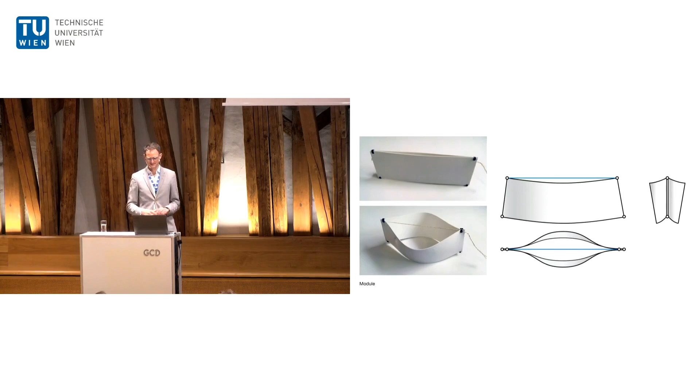So after I came back from London, I wanted to investigate with the students how to build complex grid shells or surface structures, but how to do that with very simple means, using always the same elements and the same parts. And I thought the good thing about this quest is if all the parts are the same, then they're really easy to produce. So I can just ask students to produce a part, right? They can make up any part they want, and then just start adding it together and see what happens. And so students did that, and then shape emerged from this, and I thought it was really interesting.

Another student, for example, decided a different thing. He wanted to use cubes to create a three-dimensional doubly curved surface like this. And I said, no, that's not what I wanted. I wanted you to design a complex object that then emerges into a 3D geometry. You can't just use cubes. Cubes want to be in a flat surface.

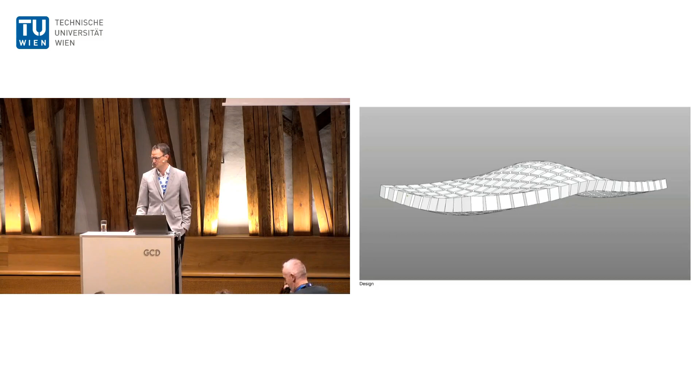He did it anyway, and then the rest of the semester we struggled with the idea of the gap, the void between these cubes, right? And first we thought, okay, we can just make single rings that are different in size, but we realized they're not only different in size, depending on the angle, they also start shifting, right?

Because they actually are not all in the same row. They have a curvature sideways, and there's also a twist that we have to accommodate for. It was getting really complicated. But again, we didn't know it, but we were learning all the time.

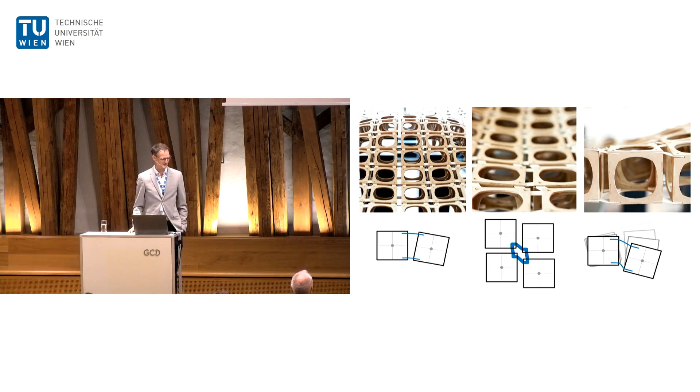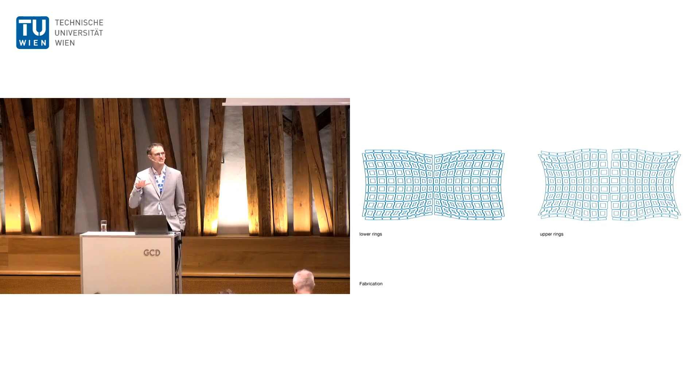And we also realized that this is a continuous law and relationship. So these are the rings on the top and the bottom, and they actually match up nicely into a continuous pattern, creating this beautiful sculpture.

One more example that I thought was always quite nice, we had students looking at folding and curved folding. It's really a hip project nowadays. So they were really doing this very fundamentally. What if I make a curved crease? I get a convex and a concave, and I can mix and match that, right? So I can create convex on the outside, concave on the inside, or vice versa.

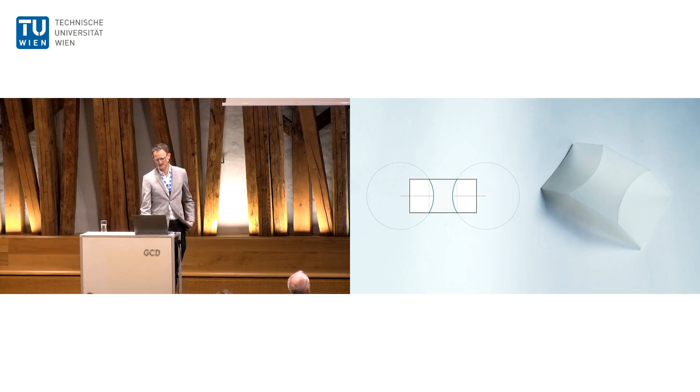And so doing this, I can also create modules where I can control the tangency on the outside of these modules. And they wanted to build a three-dimensional surface with this, and we tried not to use the computer. So we tried to do only repetitive parts. So we had this idea, why don't we just look back into the Schläfli diagrams of Platonic solids.

So if you look at the Platonic solids, you can describe the whole geometry just with two numbers. 4, 3, for example, is a cube. 4 means 4 edges to each side, and 3 means 3 faces are meeting at each node. Right? So these two numbers describe the whole geometry of a cube.

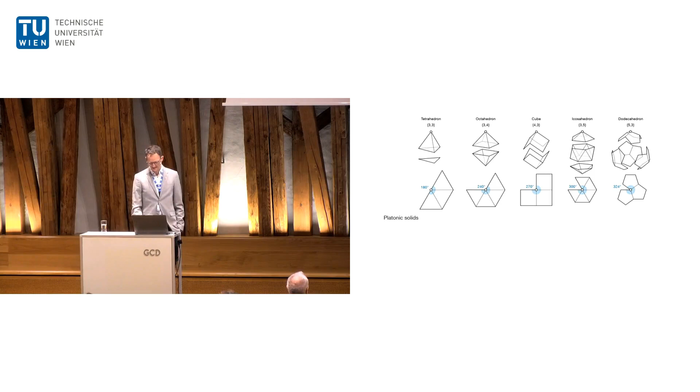So if you take those and you think about it long enough, and you want to create a curved crease model out of it, if you want to flatten that curved crease model flat on the ground, then the pattern has to look like this. If 3 things meet, it has to be 120 degrees that they meet at. And every side has to be 4 sides.

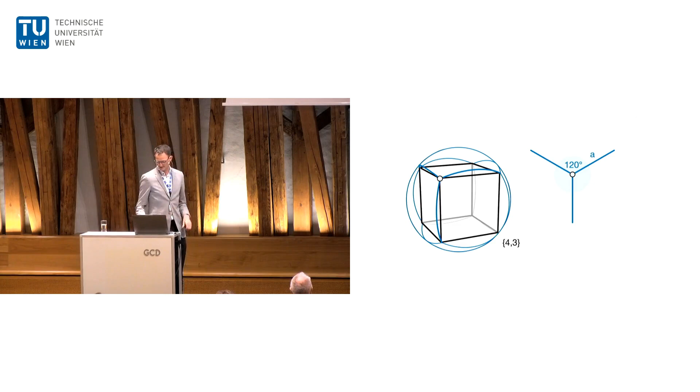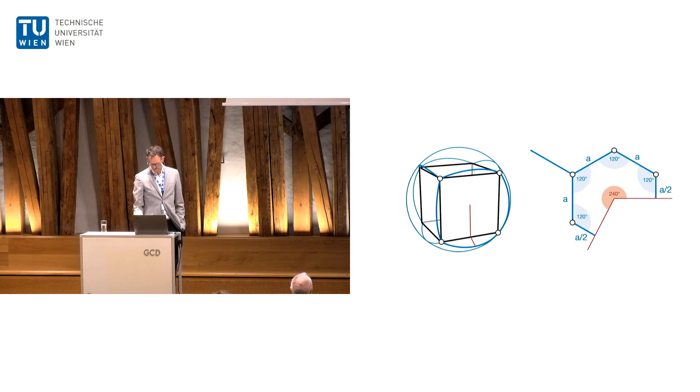So I can continue one of those elements and add 4 sides. So 1, 2, 3, and 2/2 is 4. So this must be the flattened version of my module, just based on the rule of a Schläfli diagram. So if I then put circles inside that and I fold it, voila, it actually works.

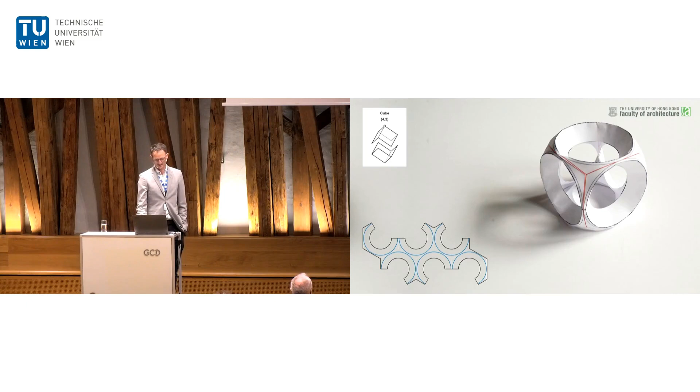We didn't believe it ourselves, but you can just do that with a crayon on an A4 sheet of paper, and you can create these beautiful curved crease Platonic solids as cube or tetrahedron or octahedron or dodecahedron or icosahedron. And so this is the one that the students decided in the end to build.

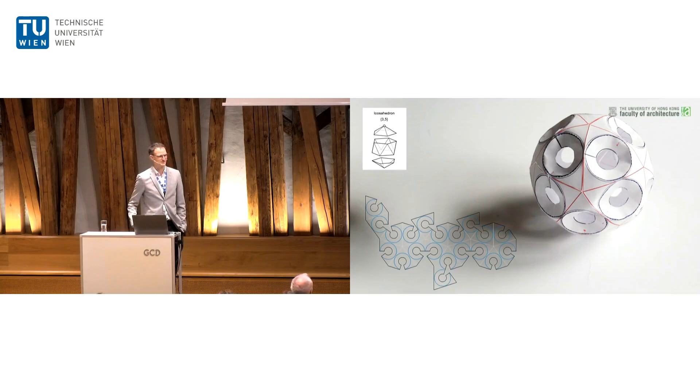And we learned a lot about geometry, about how these things go together, and how if you understand geometry and you understand the construction, or you want to simplify the construction, and you combine that even with structural knowledge, you can create very meaningful design of what I call repetitive structures, so structures that always use the same elements.

And this became my PhD, and at this point Herr Pottmann became my PhD advisor. And in this work I looked at a lot of structures that are built today out there, and I really tried to understand how can I capture this idea of repetition better. And in the end, I had to start learning more about geometry, and I realized that there's always joints, edges, and faces that need to be solved, right?

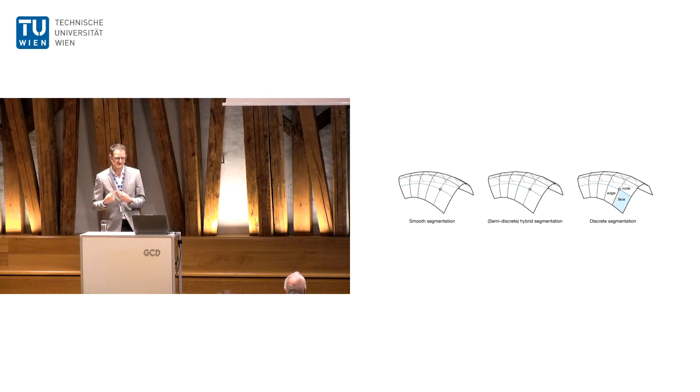So now let's go back. I tried to tackle these things in my PhD, and I realized that when we build something as an architect, we can either do it discretely, so using straight elements, but then we have all the complexity in the node, or we can do it smoothly, and then we have very simple joints, but then we have all the complexity in the edge, as we've just seen.

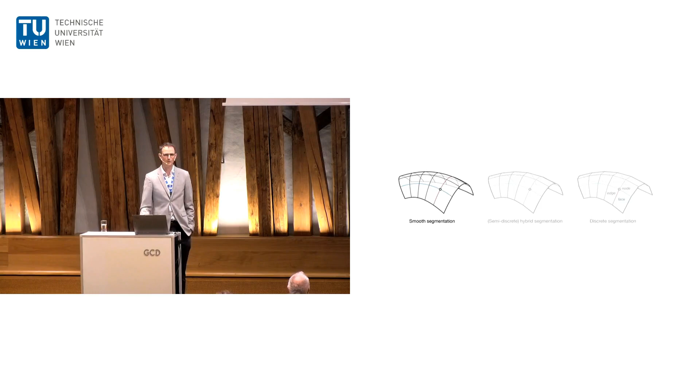And I was more interested in the smooth option, but in general, I just wanted to understand how we can control these parameters. And so I need to pick one specific thing out that really governs a lot of my research, since it's understanding the curvature at play here, right?

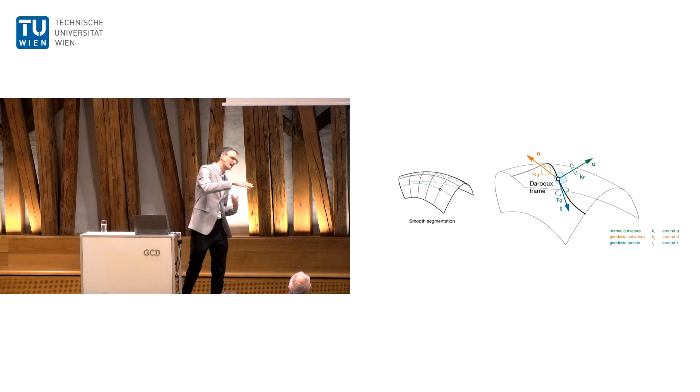So if you follow such a smooth line on a surface, it actually curves in 3 directions, right? It curves up and down, and that's the normal curvature, the normal thing we measure, but it also curves left and right, that's the geodesic curvature. And if you walk along that line, you might also tilt from one side to the other, and that's the geodesic torsion. For engineers, this is very easy to understand because those 3 local axes of a beam are the 3 bending axes, and in geometry, those are the curvature axes.

And so this is really, once you understand that, it's quite simple. And so I try to have a table of parameters that I need to control in any grid shell in order to create repetitive parts. And so I thought, if I just list all the parameters and they're all the same or constant throughout the structure, then the elements also have to be the same. That's an easy thing to do. So I started listing them.

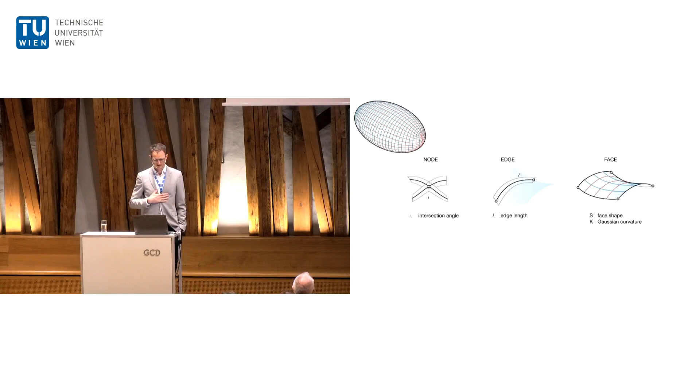There's the element length, and the intersection angle. And then for these smooth networks, there are these 3 curvatures. And you can actually just transpose that into the discrete case, and then instead of 3 curvatures, you get 3 node angles. These are interchangeable, actually. You can calculate from one to the other. And that gives you a total of 8 parameters. And there are, of course, more parameters describing the faces, but I won't talk too much about those today.

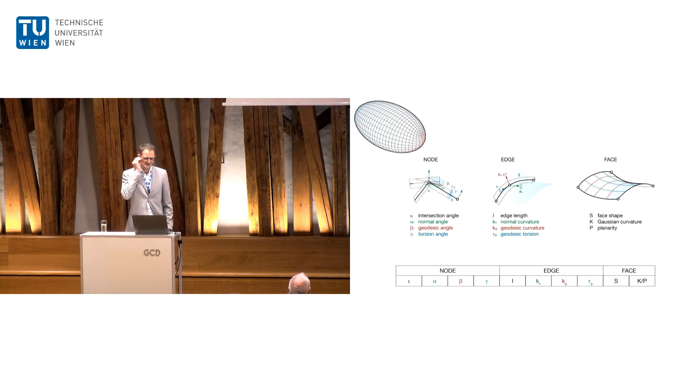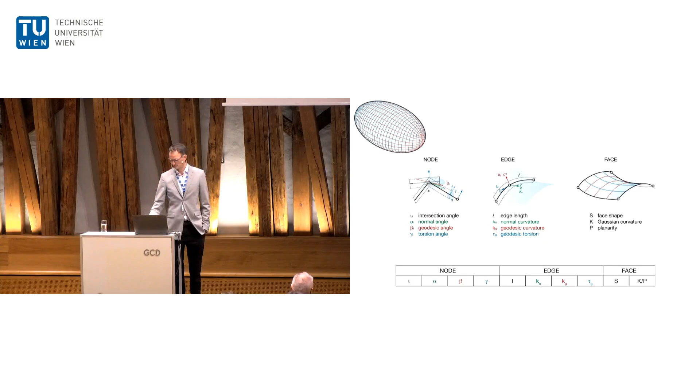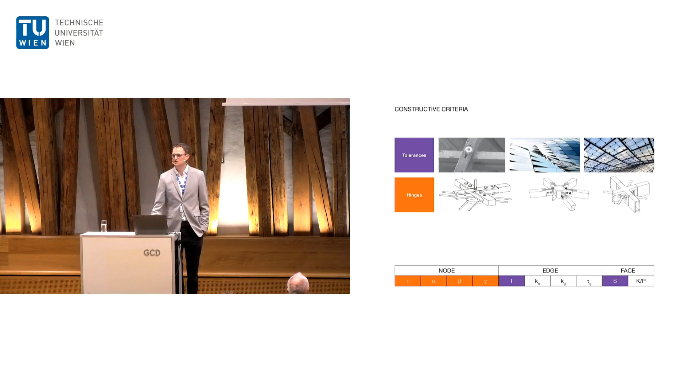So I thought, okay, that's it. But then I realized, as an architect, there's actually more, right? So you can actually build a structure from repetitive parts that's geometrically not repetitive. So there are some tricks we can use as architects and people who manufacture this building. And those tricks are the tolerance you use in buildings to account for changes in length, the hinges, joints we use to account for the change in angle, and deformation to account for the change in curvature.

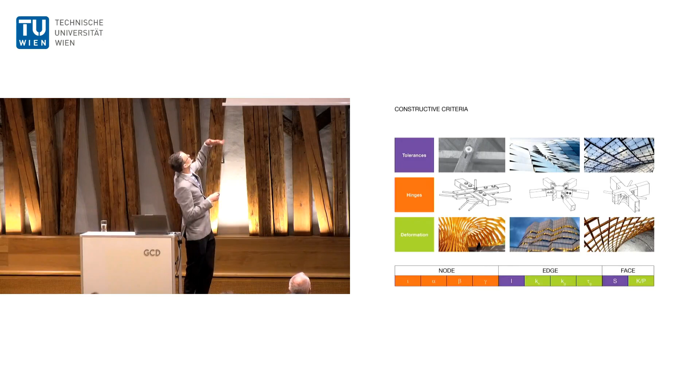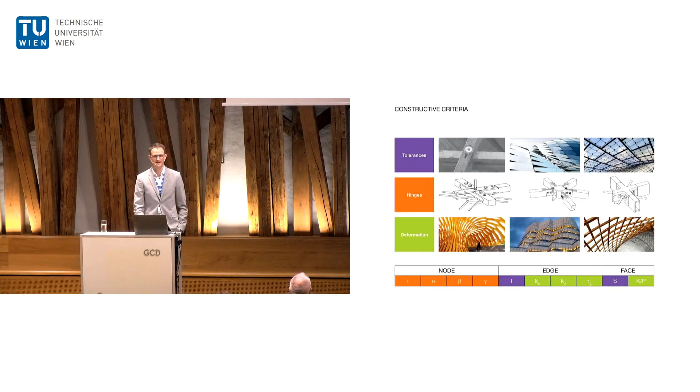And these 3 criteria nicely actually map with these different parameters, right? So curvature parameters, you can deal with elastic deformation, hinges, you can deal with the angles, and so on. So this was the very simple theoretical framework I started with, and then I started analyzing existing buildings to see how architects have solved this problem in the past. We've done a lot of work on this, and I don't have time to show a lot, but I always have to show this one example because it's one of the most important precedents to my research that came afterwards, the Multihalle in Mannheim.

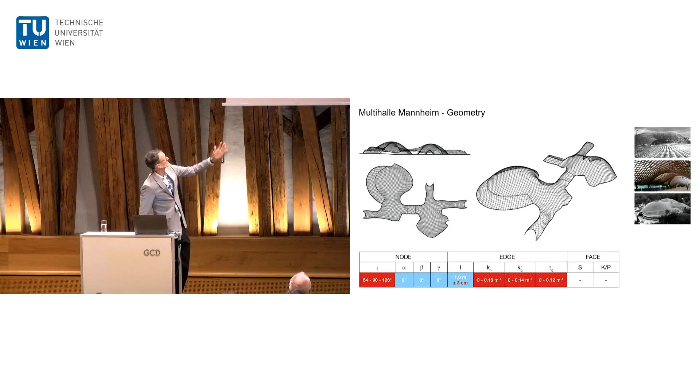So we all know how Frei Otto designed this grid shell by hanging a net and then creating this net by bending these wooden laths into the correct shape. And so we remodeled it, and we used these parameters to measure all the different parameters in this net, and here you go. There are no complex angles other than the intersection angle, and there's a lot of different curvature. And if you look at how it was built, you can see Frei Otto used a hinged joint to account for the different angles. He used a little tolerance in the length to account for that, and he of course bent all these lamellas. So that's quite simple.

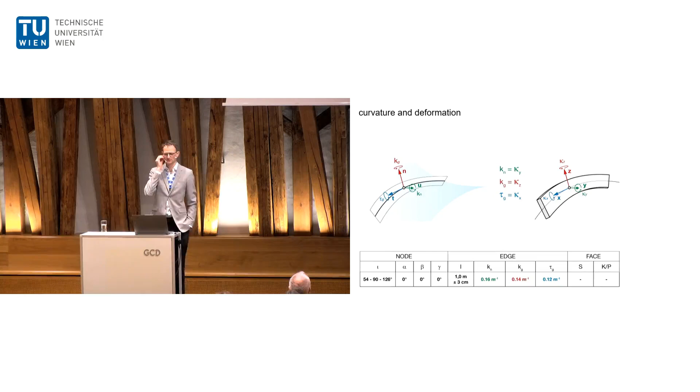But the good thing about this is now that we could really measure these parameters, and we could measure each axis, we can actually learn more about the structure and how it was built, because we can transpose the curvature into the actual bending stress that occurred during construction. So we can take these values and use the Euler-Bernoulli theory to calculate the bending, and we can use the Saint-Venant theory to calculate the shear stress for torsion. And actually for very high twisting, we need to also account for additional normal stresses due to this helix effect. So that's called the helix torsion theory. We can use that too to calculate all the stresses occurring through this geometry.

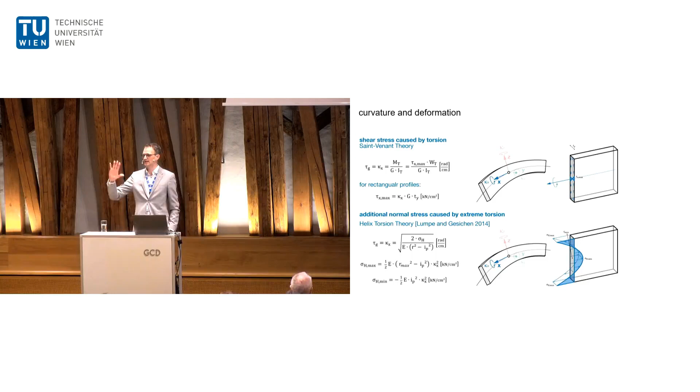So just by doing a simple geometric analysis of that final geometry, we can actually simulate what the stresses were when this Multihalle Mannheim was first built. And they did these tests too back then. I don't want to say this is brand new, but back then they only tested for the spatial curvature. And so this is now dissecting all the 3 axes of the profile and also seeing the twist that happened.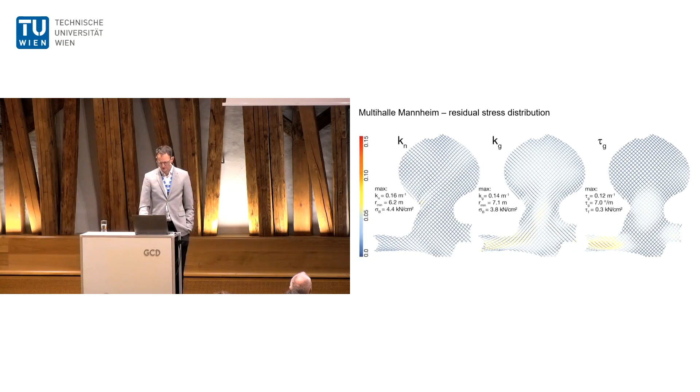As I said, we're using this a lot to analyze buildings, and I just want to highlight one more publication we did, which I actually never presented. We looked at Vladimir Shukhov, early pioneer of steel structures from Russia at the turn of the 19th century. He really revolutionized the way of how to build with steel, and the mindset was very similar. How can you take the simplest elements, always the same elements, combine them and twist them a little bit elastically or maybe even plastically? I think Shukhov didn't care, but how can you just tweak the rest on the construction site to create great doubly curved structures from very simple elements?

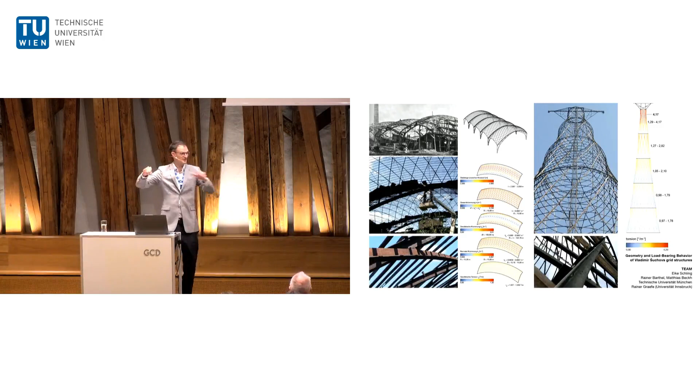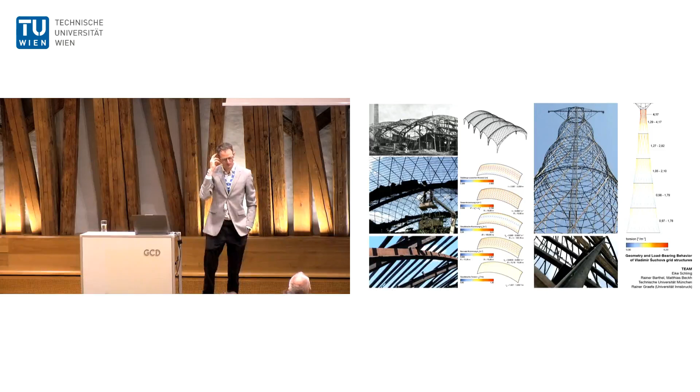And we could actually remodel those and find out, for example, that the non-constant torsion is actually highest in the top element of this tower and must have caused a lot of pain to the workers, because we knew the L profiles they used, and we could realize that it was almost 40 kilo over a meter lever that they had to pull to twist this into the right shape. And we could also model some of the other grid shells and actually learn about the construction process and also about the geometry that Shukhov must have used.

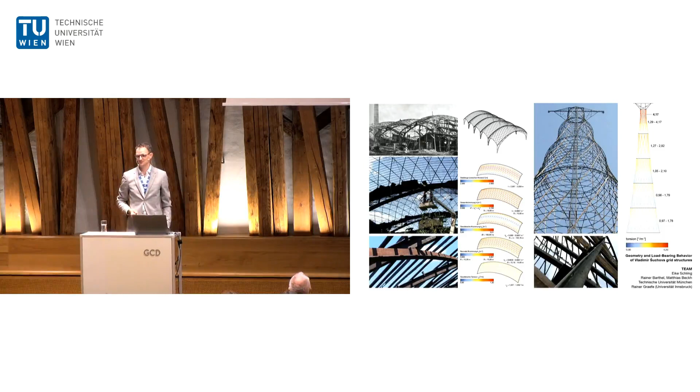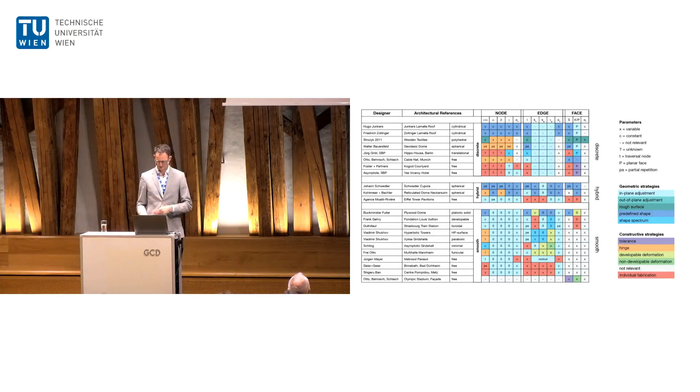If you're interested, I have more slides, but I deleted them now because I want to show you my innovation. But it is really a tool to learn about what must have happened in the past, because these curvatures were real and they needed to twist elements on site. So I used this to look at all these projects and to come up with strategies for discrete, hybrid, and smooth networks and how they could be made repetitive. And it was getting a little nerdy at this point. So what's much more interesting is how we can use this knowledge to design new buildings, new networks.

And so I had this idea: if I only look at smooth networks, I could actually list all the possible combinations, right? So if I say, for example, all the curvatures are the same, the lengths are all the same, and the intersection angles are all constant, what's the result? And then only one variable is changeable, x means changeable. And what if 2 are variable, and 3 and 4 and so on? And then you get 33 solutions. These are all the possible solutions there are. So then you can start filling that in like a periodic table of elements. These are all the slots, so let's just start filling them in. And some of them I think just don't make sense, and others maybe we haven't found yet.

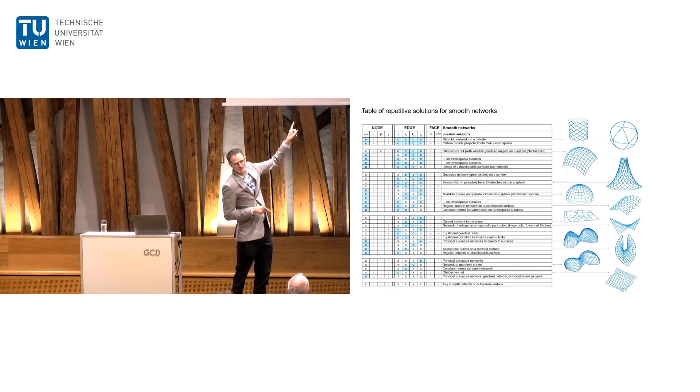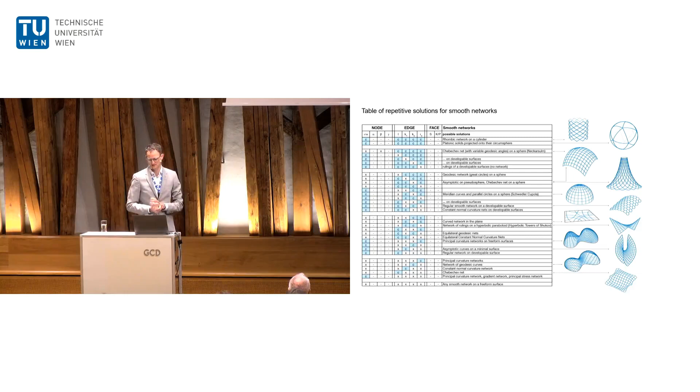But when I did, I of course immediately recognized some of them. So you have the cylinder, you have the geodesic dome that we just built before. Here, that's Multihalle Mannheim right there, the Chebyshev net. So there are some familiar faces popping up on this scale, and there's other ones that we hadn't seen so much yet, and that were really interesting to investigate. I specifically focused on this one, and that is asymptotic curves on minimal surfaces. Why was this so interesting to me?

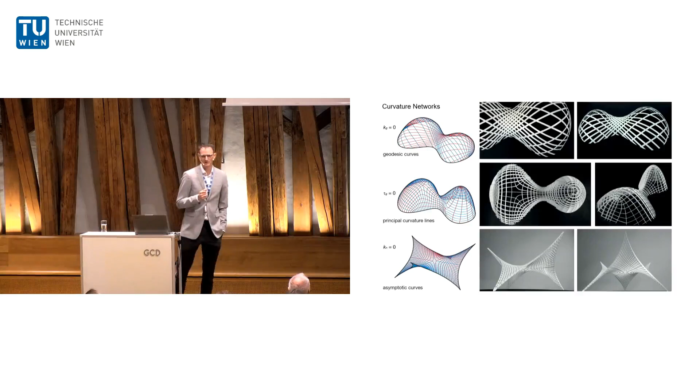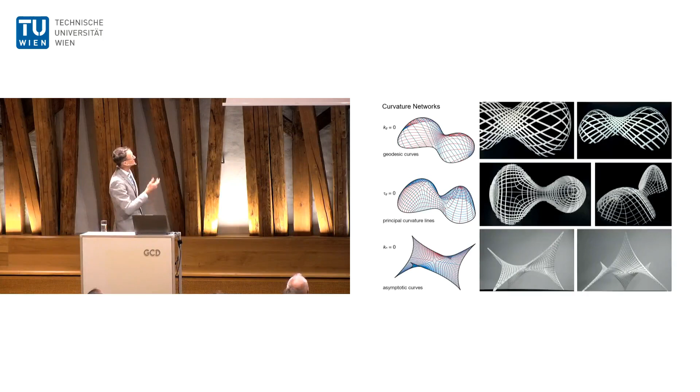Again, it goes back to these 3 curvatures that I described before. If you keep one of them constant, they create these 3 different networks. So if you have a constant geodesic curvature of 0, you get a geodesic network on the top. If you have constant 0 torsion, you get a principal curvature network. And if you have constant 0 normal curvature, you get this asymptotic network right here. And why was I so interested in it?

Because you can create these only on negatively curved surfaces, but you can create these doubly curved networks with lamellas that are initially straight and they're standing upright, so they can actually take local bending, but as a global structure, they can work as a grid shell and transmit forces like that. And I realized only much later that this is very similar to one of the first models I built. This probably, if you look at it, must be following the same geometric rules.

So we looked into that, and we went a step further and designed these asymptotic networks on minimal surfaces, because in that case, they meet precisely at 90 degrees. So in a minimal surface, the two principal curvatures are exactly the same, they're at equilibrium, and so the axes where there's no normal curvature are also at equilibrium, exactly 90 degrees from each other.

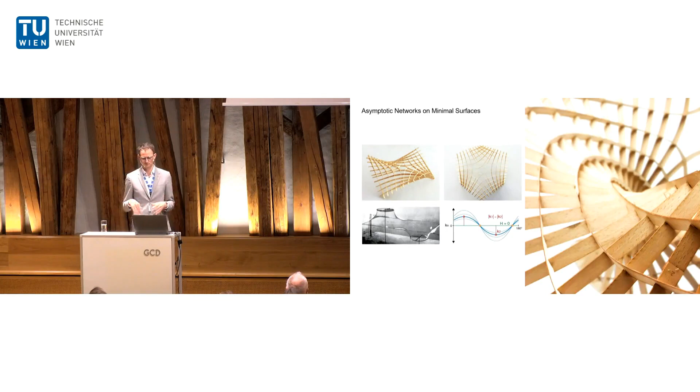So you can create these beautiful models out of straight strips where every joint is identical and they all meet up at 90 degrees. This first model was built on a Schwarz D surface, so we just used a mathematical model, but soon enough we developed our own little script to trace these paths, and so we started designing minimal surfaces, and then clicking on these minimal surfaces one by one.

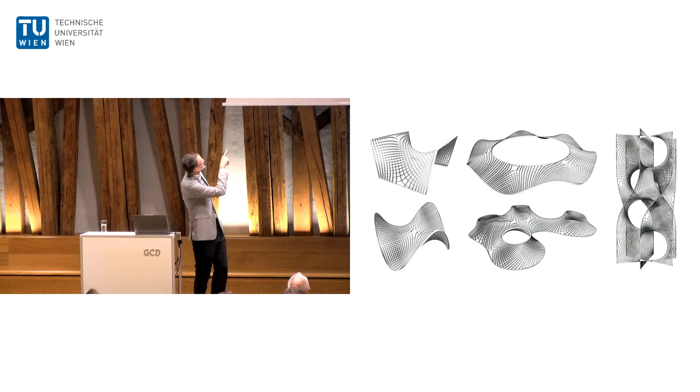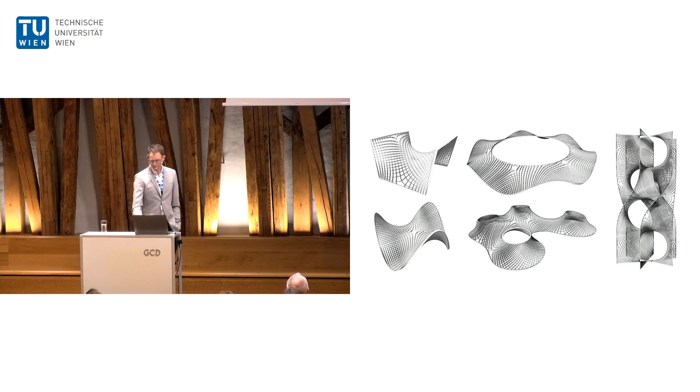It took very long to trace these elements and try to get familiar with the grids we could create, and you see some singularities popping up at planar areas. So we cannot control this as a designer. This is just an emerging net based on the surface we're doing. Actually, since the surface is also predefined as minimal, the only thing we can design at this point is the boundary.

But we were quite intrigued by this, and so we started building our first prototype in timber, and you see we learned from Frei Otto. So for example, we started adding several lamellas together on the sideways to get more stiffness, to prevent buckling. The first model we built purely in space, and it was very hard to control this. It took us forever until we noticed in our second prototype that, just like Frei Otto, you could just assemble this flat on the ground. You can see that in the row down here.

If you assemble these lamellas flat on the ground and you just push on one side, the whole network will naturally deform into the design shape. It is actually a compliant mechanism. We noticed this purely by chance, but because there is a scissor joint which kind of restrains the movement, and because you have a high profile which can only bend sideways and twist, there's not that many ways to go for this network.

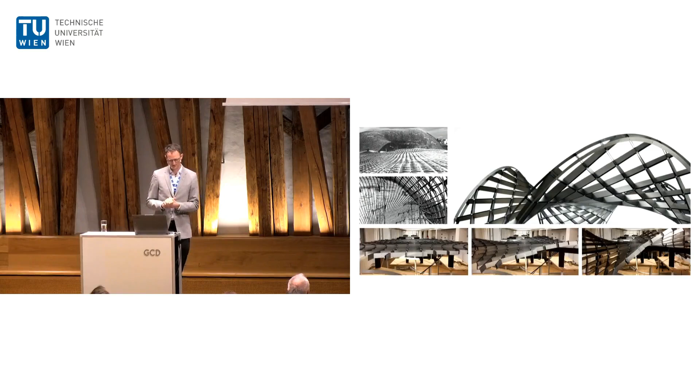So based on this, and I have 23 minutes to talk, perfect timing, so I have 20 more minutes to talk to you, I would like to show you 3 projects, or actually a few more, projects in steel, glass fiber, and timber, in which we use this technology of asymptotic grid shells to design these structures.

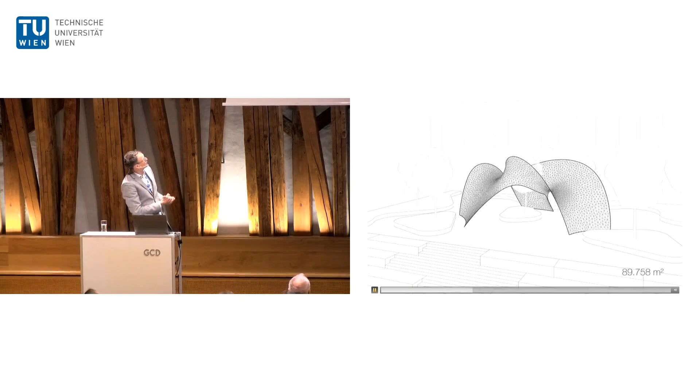So the first one was part of my PhD at the Technical University in Munich. And the workflow went exactly like I explained. We only designed the boundary. It was this beautiful courtyard, and there was a tree in the middle. So we designed this catenoid surface around it and then deformed it to create a minimal surface. We actually did a mesh optimization back then. And then we used the algorithm to trace these paths one by hand, because we didn't have Helmut yet to help us.

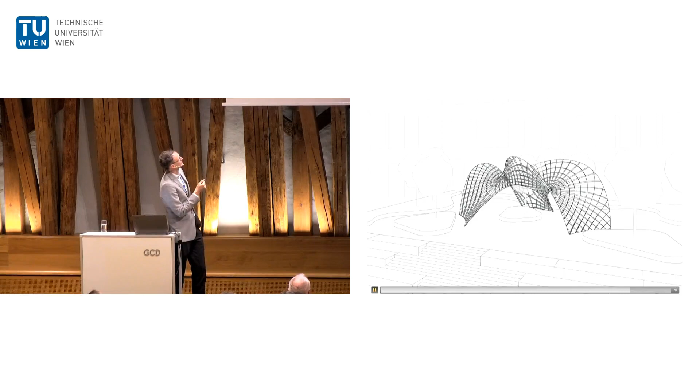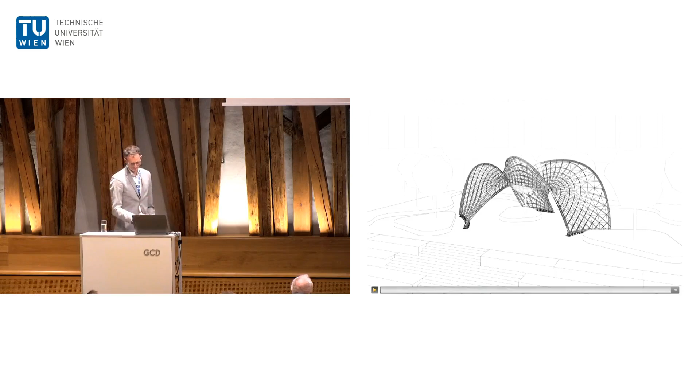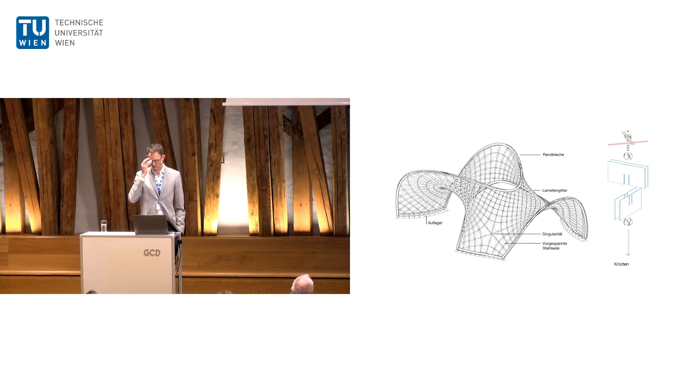And then we got this orthogonal network, and in the end we just had to add some edge support and supports and diagonal bracing to make it into a real grid shell. So what we get is a very complex structure that can be built from just flat sheets of metal, straight metal, and has repetitive joints at 90 degrees. And the whole steelwork was delivered to site and looks like this. I asked 3 times if it's really everything, and they said yes, it's everything you ordered, because it can be packed so nicely. It's flat.

So the workflow to build this is we take these straight lamellas and we prefabricate these 90-degree joints one by hand. Everything is really low-tech at this point. We slot it together into planar segments, and these are then deformed into the 3-dimensional design shape. We need to fix that design shape by just fixing the 90-degree joints and adding some extra edge supports, and then everything is brought to site and assembled like a 3D puzzle into this grid shell. And finally, we have to add a pre-tensed cable network to ensure that it's nicely braced. And this is the steel pavilion.

This is now at the TU Munich, and it's become kind of the Instagram background. Yeah, everybody, it's so Instagrammable. So if you want to have a picture, go there. Yeah. All right.

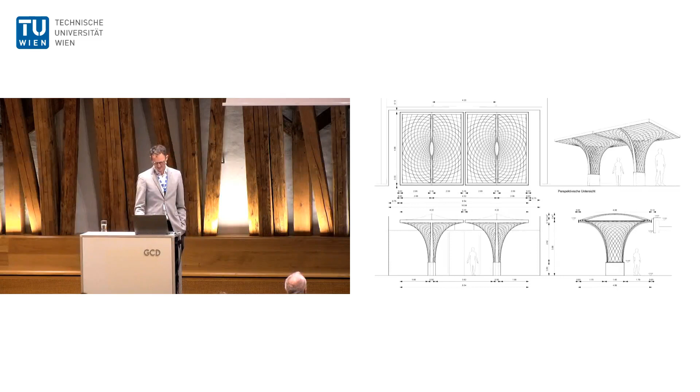This was quite successful, and people saw this and actually asked us. So we got our first commission for a small roof, and now we had a client. It had to be structurally approved outside the university. It needed to be on budget and on time. So a very different situation, but we were quite happy with this, and we went for a modular prefabricated approach. In this design, everything is bent.

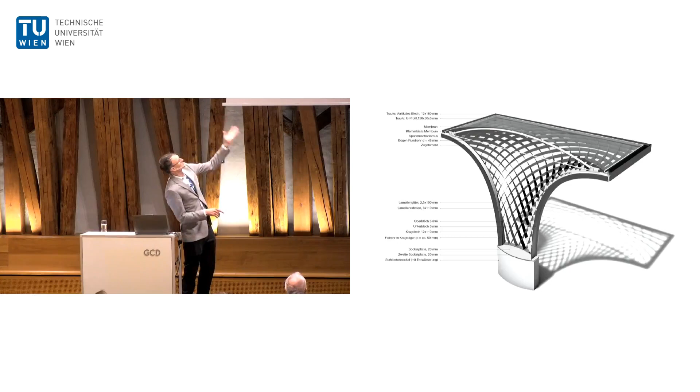So the grid is elastically bent, the arch is being bent to stretch the membrane, and even the cantilever beams are plastically bent to fit to the grid inside them. So it's a really nice building process, because we actually do kind of what Frei Otto did. We do the inverted hanging shape, we pull it up, and it naturally goes into the design shape.

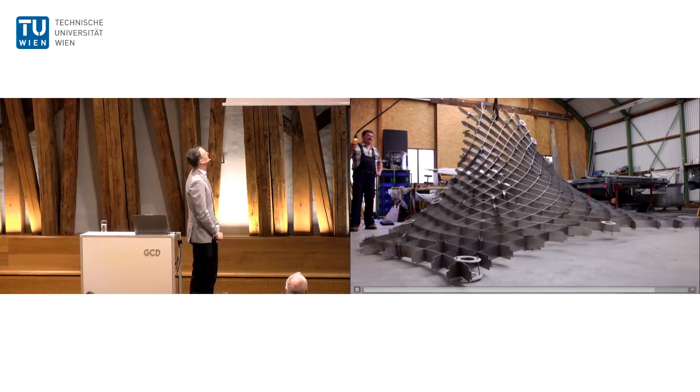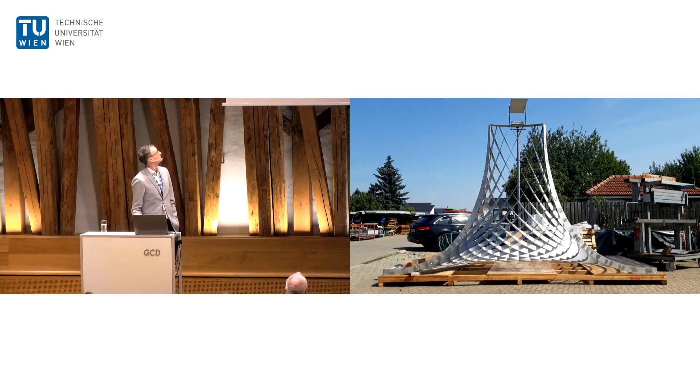And then once we have that final shape emerging, we just welded the joints at that particular situation. This is not a minimal surface, so the joints in this case are not 90 degrees, they just end up where they need to end up. And so the module looks like this, and 2 of those were produced and then brought to site. These are my 3 kids on the site visit with me, and this is the final project.

So what we got really intrigued by at this point was this kinetic behavior of these structures. So there was this beautiful inherent logic that these grids would move in a very specific way, and they would also find an equilibrium state, which was not necessarily flat. So the interior stresses would push it to stay maybe sometimes in a 3-dimensional state.

And we started investigating different topologies, right? So first one flat topology with singularity, cylindrical topologies. This one is 4 cylinders with 4 singularities. And we were just interested in what's possible, what movement can we achieve, and how can we control this movement? So then we started to think about actuation. Can we include cables and then have these transformable roofs appear that we can control remotely? Maybe these could be roofs that open up and close during the day and at night.

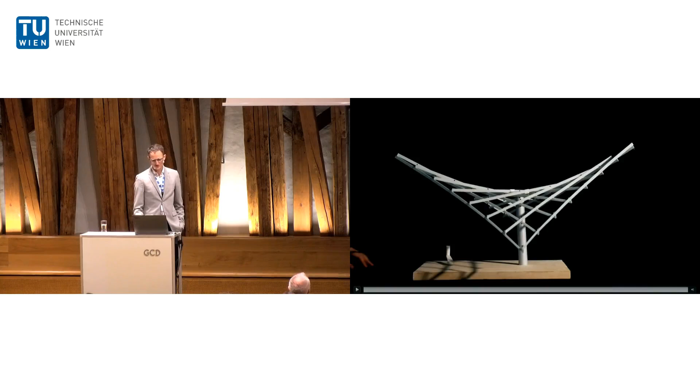And we investigated 7 of these shapes and also learned a lot about the influence of, for example, cylindrical topology, or singularities inside the net, and how they restrict the movement, or how the movement is broader and more open. And we had an interactive exhibition in Hong Kong to actually have people play with this themselves. We built these glass fiber models where you could just learn about this movement yourself.

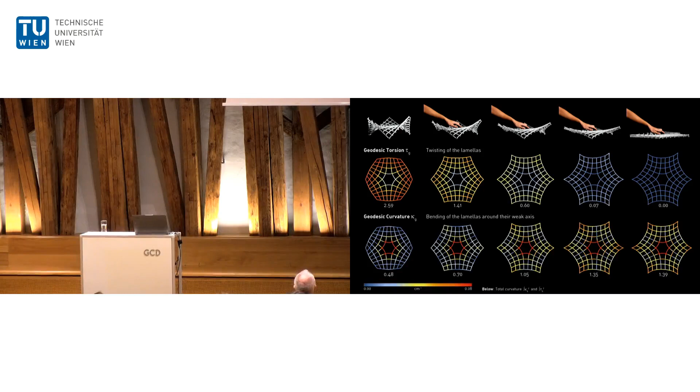And we created a digital workflow in which we could simulate that movement and then measure the curvature of each state and calculate the total curvature in each particular state. So we have the total curvature, geodesic curvature here on the bottom. On the top is the torsion. So when it's flat, the total torsion is 0. There is no torsion, right? But there's a high total geodesic curvature. Now, if it's in 3D, it actually has much less geodesic curvature, but a lot of torsion. So there are 2 kinds of curvature going against each other.

And so depending on which profile you design, you can now design where the equilibrium state will be, where this grid will naturally stay, right? So if you make it very much resistant to torsion, it will try to avoid this state and go towards the flat state. If you make it very resistant to sideways bending, then it will pop into this state. And so that's what these lamellas will do. They like to be twisted, but they don't like to be bent.

So basically we have now a 4-dimensional or 5-dimensional design, right? We can design the shape, we can design the movement, and we can design where that movement in the energy state ends up by designing the section. It's getting very complicated, but it's also really cool that you have these natural movements that are very strong, by the way. So each state is very strong in itself. It doesn't want to leave that family of surfaces.

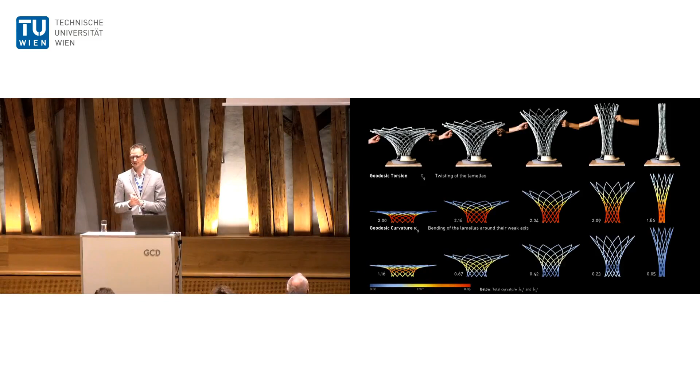And so we designed this umbrella shape that in theory should naturally close just by its internal stress states. That worked really well at a 1 to 10 scale. We then scaled it up to 1 to 3, and it already kind of went like this, right? And then at 1 to 1, gravity plays its role, and it just wants to fall open. So everything I just said works if you don't account for gravity. If you do, it doesn't work anymore.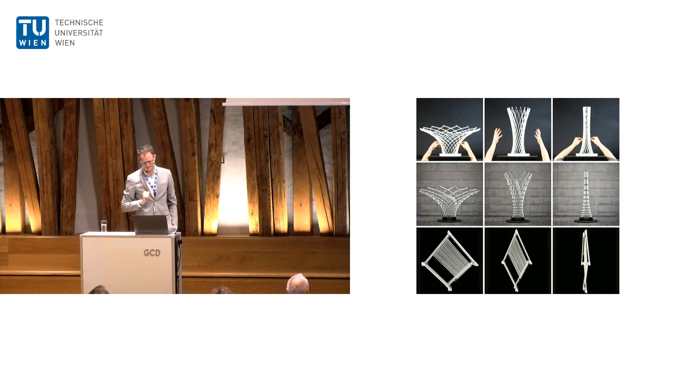But for us, that was actually not too bad, because we could have a tensile ring that would force it closed, and then if we wanted it to open, we just have the ring open, and the flower would naturally start blooming. So this is what we did. Actually, I was stuck in Hong Kong at this point, so all credit goes to Jonas Schikore, who just finished his PhD on compliant grids with this as his project.

And it's really a different kind of game there. It's really high tech. If you want to have these movable structures, we needed specific hinges that would account for that movement with no friction. And we have this actuator in the middle that controls the movement. Here are some moving pictures to show how this works.

This is always done as a student project, so we have students preparing these templates and preparing the lamellas, and everything is done from repetitive parts. In this case, it's even a rotational surface, so all the lamellas are the same, all the joints are the same. It was prefabricated in the shop into the cylindrical network, and right outside the factory, we built the concrete and steel foundations, and then the whole thing was lifted in place.

Finally, we added a shading facade, and this is actually now a next research project that's going on. How can we clad these transformable nets with a membrane that works? So this is a final shot, and you can see the actuation cable leading up.

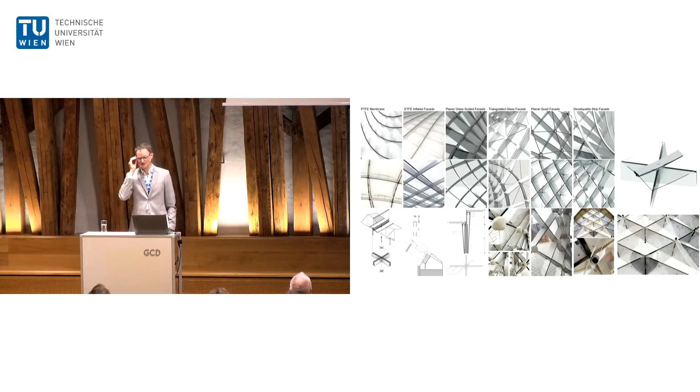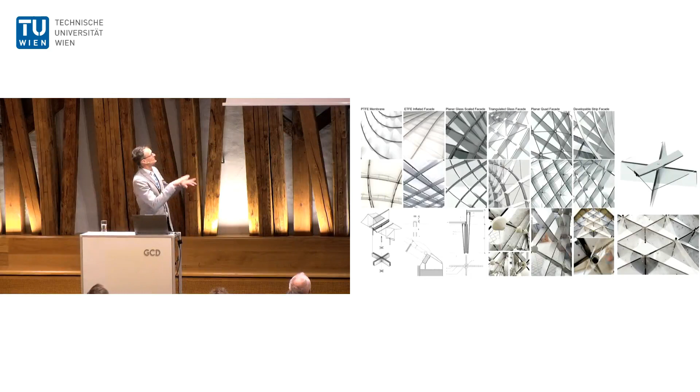We started with the facade investigation, and I just met Marias. She had played a big role. I don't think I have an image of you here, but you did your whole master thesis on planar glass tiling of asymptotic networks, and we came up with the idea of actually tiling it or having developable panels on this facade. And so the question is, how can we have a third direction that's also straight and simple and flat? So these mullions, these facade mullions.

And so our idea was that we just add a family of geodesic planks. So we use the same material again, this time flat in a triangulated direction. We wanted to build timber grid shells from this, so use timber and reuse the timber, so everything should just be combined. We have off-the-shelf planks directly from the sawmill that we can use and then only screw together, like weave them into this basket.

And I'm showing you the Centre Pompidou in Metz again, because by shifting these lamellas a little bit, we actually get this tri-hex pattern, the same pattern that Shigeru Ban used, and suddenly the circle started closing because we're working actually with Holzbau Ammann again. The same group that built the Centre Pompidou in Metz is now helping us to realize this project.

So this one is not trivial, though. It's very hard to generate a mesh. And so to generate these combined meshes of asymptotic and geodesic planks, we worked with Helmut. By now we were on first names. And this group in KAUST. And Hui Wang actually did the discrete optimization for these.

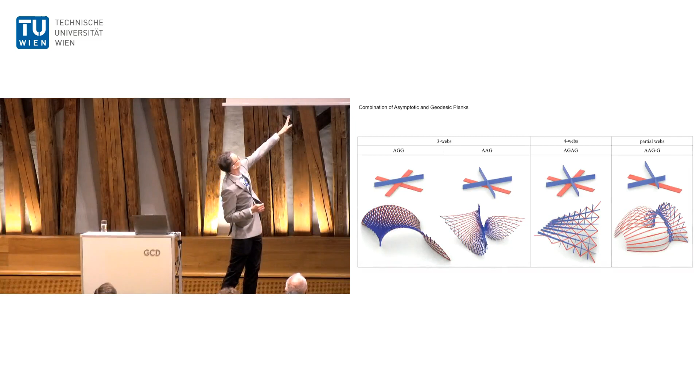So there's several things you can do. You can have one asymptotic and two geodesics, or AGGs, or also families of 4. We are focusing on 2 asymptotics and 1 geodesic, the one in the middle. We call it an AAG network. And you can discretize that by having several rules on a mesh.

For example, you can ask all neighboring points to be in the same plane as the single vertex, and that will give you an asymptotic mesh. And you can ask for diagonal points to be in one plane with the surface normal, and that will give you an additional geodesic net. And we could create these networks and create these AAG meshes.

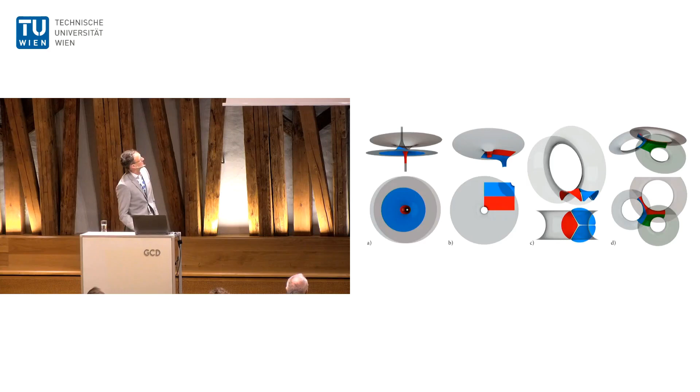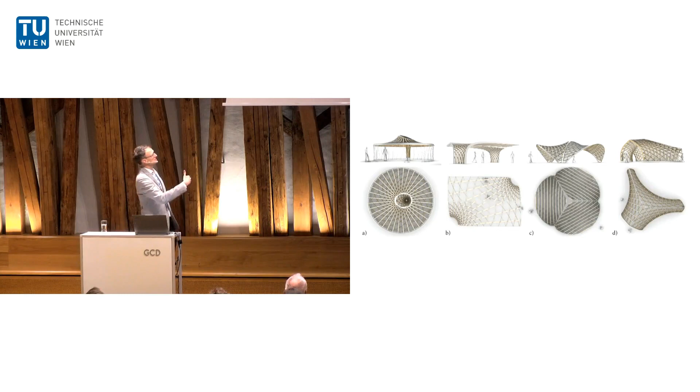And what we realized, to initiate this optimization, we usually had to start with a rotational surface. So for our own architectural design workflow, we started designing rotational surfaces, modular construction. We thought, how could we combine these to create beautiful shells? And we created a parametric workflow to quickly combine these rotational surfaces and also to then fill in these meshes. We could do all that on the fly, and we would have the rationalization later. So we were really excited.

We started testing timber and looking at local wood and the properties of it. And then we called up Holzbau Ammann and said, we need ash wood in 8 millimeters, because that would be perfect for our design shape. And Holzbau Ammann said, we can do that for you. We can take a typical lamella and just sand it off until we have 8 millimeters, and then we can send it to you. And so this was, of course, going against our idea.

Our idea was to use the real material from the sawmill and to use it directly in the structure and to maybe even reuse it. So we had to go backwards. So we asked, what is the typical profile that you get out of the sawmill? And they said, the smallest thing we can produce is 100 by 25. And then we can just split it in half one more time. That gives you 2 sections of 12 millimeter. So we actually had to go backwards and just work from that and then redesign the building for this particular section.

We were using ash timber, which is really strong and very elastic. It's great. It's what's used for hammer handles and bows and arrows. And it also is in high supply at the moment because of a fungus called ash dieback. So there is a sad reason why this was actually quite cheap to get.

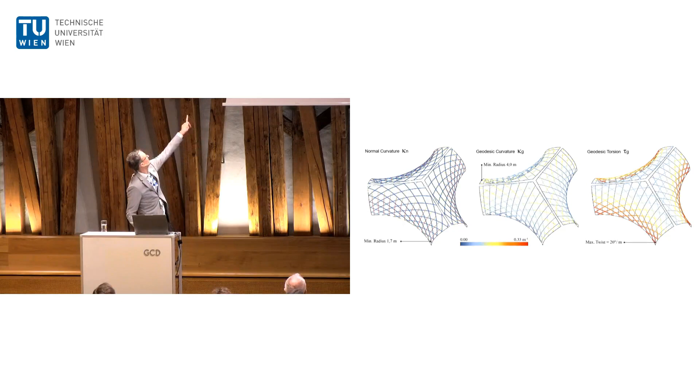So we redesigned the structure to fulfill exactly this bending radius that we were allowed, 1.7 meters. And this is what we got, this triangular dome that should work as a grid shell. We then went back to Hui, and she wrote this optimization for this particular shape that would not only allow us to have asymptotic and geodesic planks, but also that all the angles would be exactly 60 degrees. So we have repetitive joints again. And also that all the edges would also follow these straight planks that would be geodesic.

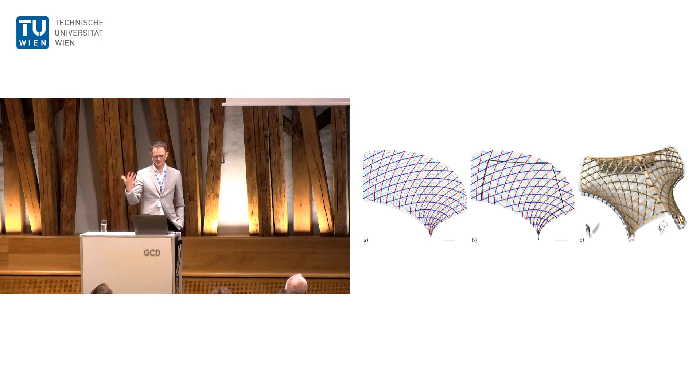So we got the optimized mesh back, turned that into a NURBS geometry, and did the final designs. And now with this geometry, we can build the whole grid shell just using these hexagon studs as the joints. All the material we're using is flat ash timber from the sawmill, as well as flat mullions and flat polycarbonate sheet plastic for the facade. And all of this then went together to build the timber grid shell. And I'm just going to show you a few more images of this project.

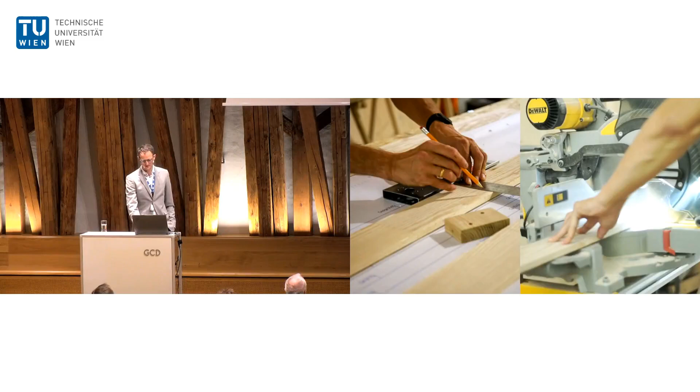This is how we prepared the pieces and milled them and drilled them with our templates. And then in this case, we actually prefabricated the curved beams. So we took always 2 planks, put them together, bent them in the right shape, and these curved elements were then assembled flat on the ground with an interlayer of geodesic planks. Again, like in the first pavilion, the nice thing about this is that we can nicely assemble on plan. We did it in 3 prefabricated modules. The module in itself is now ready and bolted together and is then bent into the 3-dimensional geometry.

At this point, the flat planks, the geodesic planks, are not fixed yet, right? They're still sliding, or else this would not be movable. But once it reaches the 3-dimensional shape, we then fix these geodesics, and we get this module that we could just roll out of the workshop, combine with the other modules, and finally put on prefab concrete blocks to be supported as a grid shell. And once the structure was finished, we had to add the facade, all from planar polycarbonate panels that had to be slightly tailored, though, to create this doubly curved, smooth facade surface.

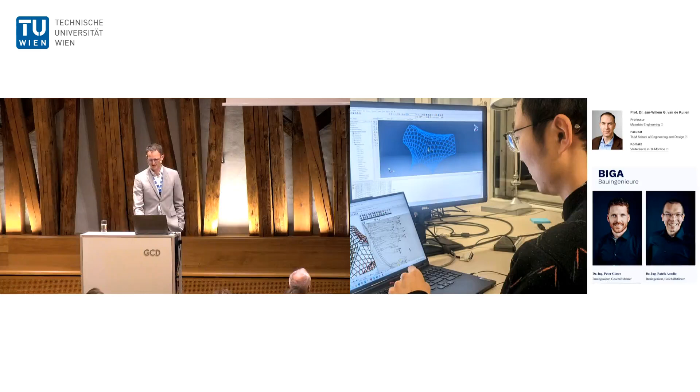And with this, we're now working also with material scientists to look at the long-term behavior of the timber when you deform it like this, and especially with the high torsion in it. And we're getting the structural approval for this as a building product.

So with this, I want to close my talk, and I think I'm 2 minutes over, but that's fine. I hope I could show you a little bit of how you can use geometry, structure, and construction to create meaningful design.

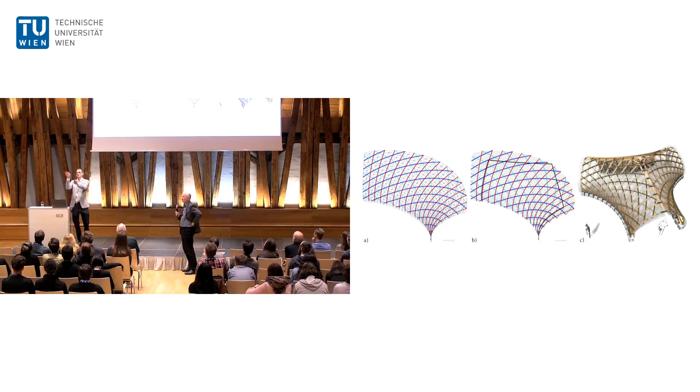Didn't you motivate this additional introduction of geodesics to have simpler faces? Or maybe I'm confusing this. Yeah, I motivated it to also add a facade to it. The same element that we're using to brace the structure is also the aluminium mullion that holds the facade. Thank you for the question. I realize I never explained that, but when you later put the facade on, it follows exactly the same path, just on top of the structure, holding, here you see it, the developable panels in place. So it's the same one, just an offset of it.

Maybe one more. Thank you. Quick question. Thank you very much for this very interesting presentation. It's fascinating what can be done in this geometry.

Why did you cover this structure with a rigid element and not with a tensile membrane or a film? We had this idea before, also for the first pavilion, we could just stretch a membrane over it, and it's a minimal surface. So there are several reasons. I think you can do either. If we would really stretch a membrane over it, we would have to ask ourselves why we built the grid in the first place, because the membrane is absolutely fine with just the boundary edges.

There is a reason to use membranes sometimes, but we wanted to show that you can use absolute standards. These are polycarbonate hollow profiles, off-the-shelf pieces you can buy in every store, and we wanted to show there's a very simple way of cladding this, like you would clad any greenhouse, so we chose this for that reason. For our architectural project we wanted a membrane, and there we had a membrane stretched by an arch. You can look at both. It's not either or.